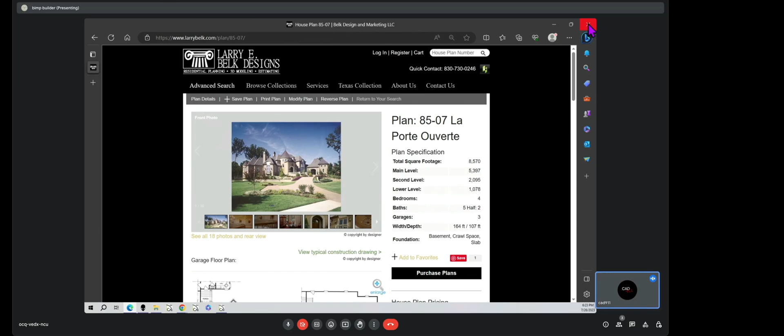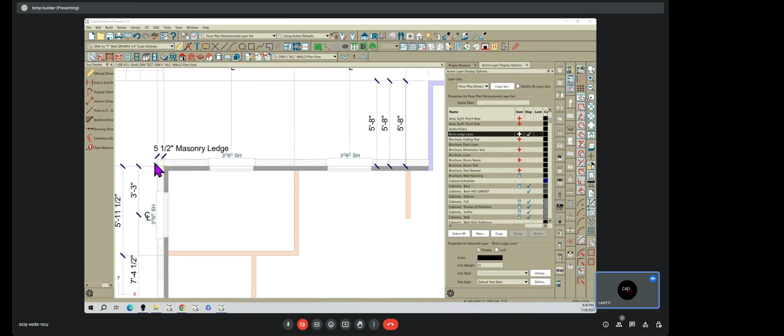And then I like to have a dimension over the brick, because if you have brick, most of my builders use a 5.5-inch brick ledge. They just take a 2x6 and turn it flatways on their forms, and that recesses it down.

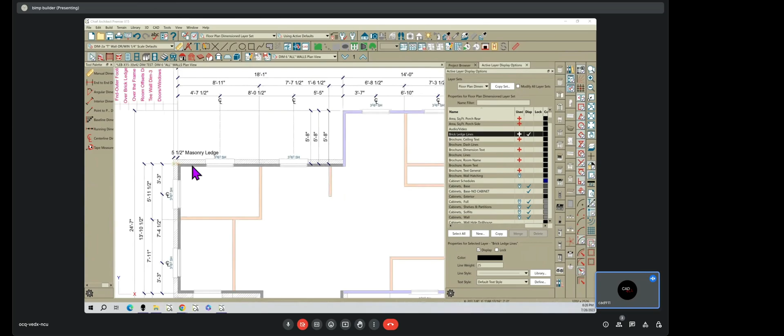And the problem sometimes with Chief, and I noticed it on a video that Mike just recently sent me, is if you click on a wall and go into your wall definition, and this is a brick wall, and you start looking down here at the wall properties, I have 5.5-inch depth. Well, it's 5.5-inch in width, like up here. The extension is 5.5 in width, but it's only 1.5 inches in depth. So a 2x6 turned flat is 1.5 inches.

So I think Chief really needs to have one more dialog box right here, where the depth is one thing and the width of the brick ledge is another dimension, because it's not 5.5 inches here and 5.5 inches up there. So, you want to chime in, Mike?

Yeah, so like in Tennessee, where they put the brick down below grade, I could see that would be an awesome thing to have, but they hardly use slabs. They use CMU on footings. But same thing though. You could go down so many inches vertically and then still go in. And I think they did 5 inches in Tennessee, I can't remember. But I know their airspace.

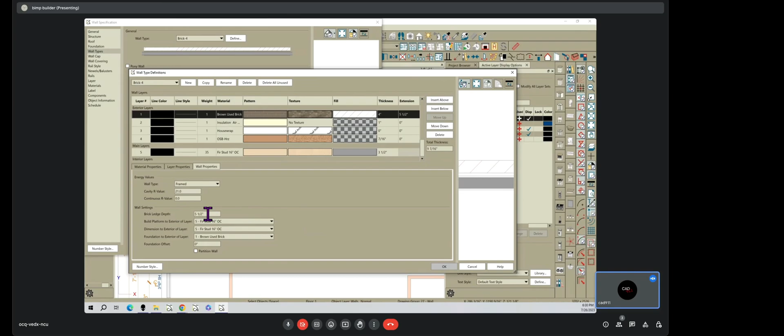And the same way if you're using thin set stone. Yeah, cultured stone. Usually, if you go by the manufacturer's recommendation, that winds up being 3.5 inches out. So you have a 3.5-inch masonry ledge if you're using that, because otherwise that stone is hanging off of the slab, and you just don't want that. It looks awkward. Yeah, it looks unnatural.

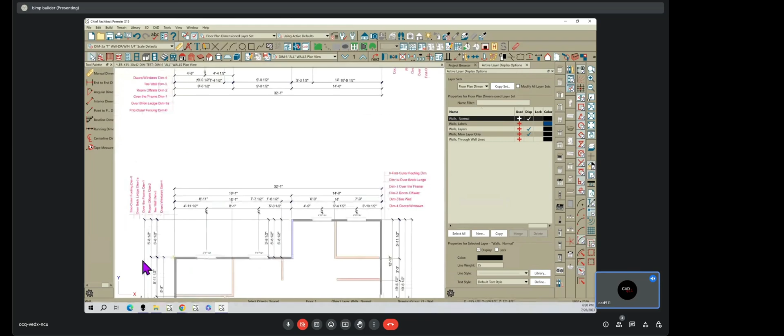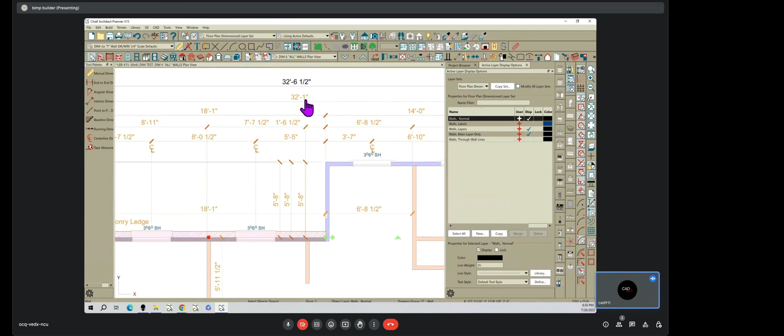I'll show you over here. Let me find it. Well, it's not turned on. Anyway, on these other plans I had a 3.5-inch ledge and a 1.5-inch ledge. But you can see on this plan, if you look at the dimension 32.1, that's over frame to over frame, and you've got the 5.5 inches here, and over on this side the 1.5 inches, and it should be 7 inches.

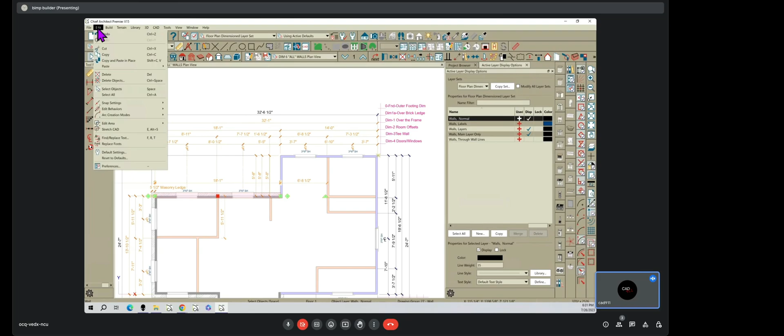The people that are watching right now see the finished product. Can you walk us through how you've set up the automatic dimensioning to do this? Yeah, let me just kill all of these dimensions, okay? We'll go down to automatic dimension and kill those. So this dimension here, it did not kill because that's a manual dimension. I had to put that dimension in manually.

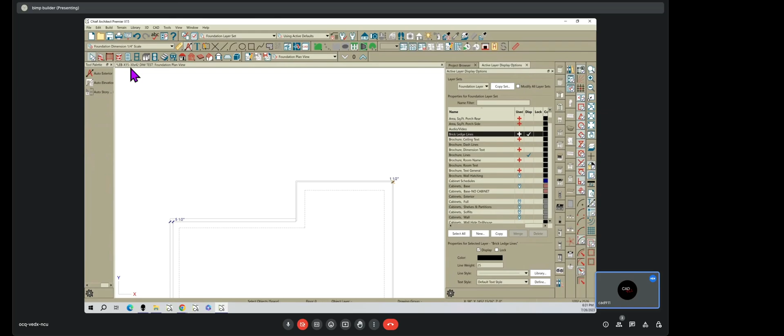While you're at that, let me ask you: if you were on the foundation level, then that dimension would be automatic because it would read to the outside of concrete, right? But if you're on the main floor or above the foundation, it doesn't read to the outside of concrete? Okay, there's the foundation. So if I hit automatic, there's the correct dimension. See, 32.8, 5.5 inches here, and 1.5 inches here.

So it's going over the brick and over the stucco ledge. Which is what you want as a foundation guy. You want those dimensions. I didn't hear you, what'd you say? Yeah, if you're the foundation guy, you need those dimensions to know what your maximum concrete span is.

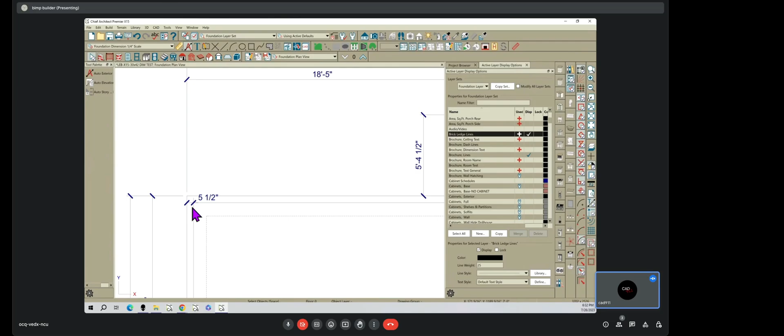Yeah, and the other thing, you need this dimension because if the concrete man doesn't have a dimension telling how wide the brick ledge is, he's got to go hunt for it somewhere on the plans. And if you go to the floor plan, it's not showing up in Chief because they really don't have that. On my plan, I had to go in and create that.

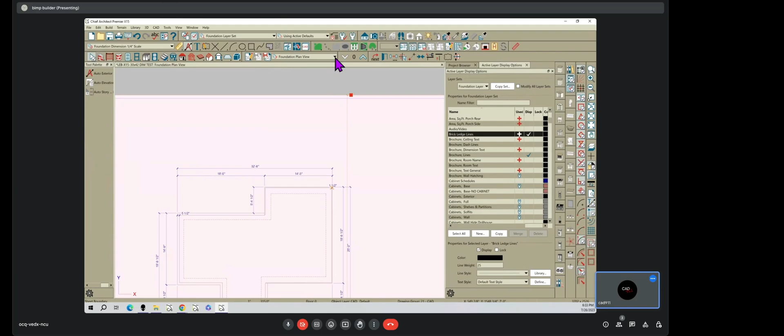So that's one of the problems I see with this, okay? Because if you go, let me go to my working, see this brick ledge right here on my floor plan, I had to create that, okay? Because it's not showing up on the working plan view. Brick ledge shows up on the foundation, but it does not show up on the working. At least I haven't been able to get it to show up.

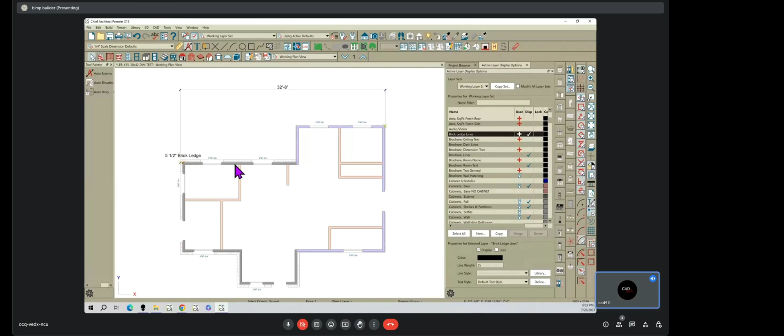Now, guys, like I said, I'm still new to Chief. So some of you pros out there, maybe y'all know how to do that. I just haven't been able to figure it out. The wall type is brick, and you didn't draw that hatched brick line. Yeah, you double clicked on it, and you see it is a brick wall. So Chief's drawing it. You're just not able to auto dimension to it. No. Does it dimension? I want to be able to do that.

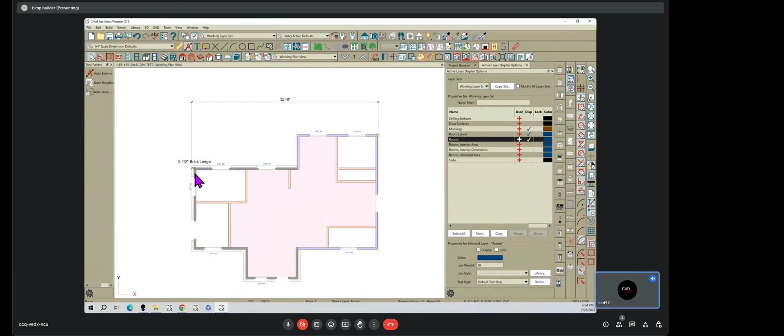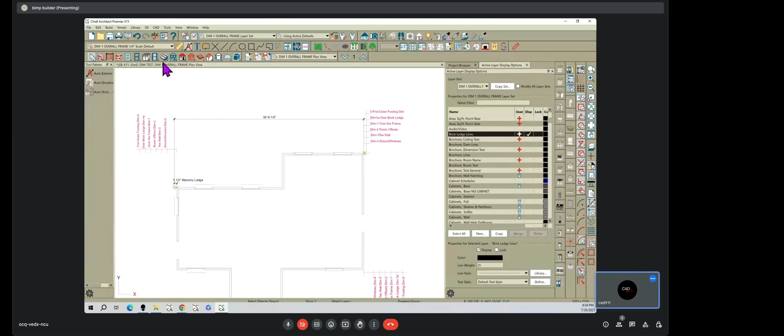Yeah. So anyway, what I'm trying to do is to go in here, and I have a dim one dimension, and I like all my dimensions to be on a layer to themselves, just like I've got right here. So I go with dim one, and I hit auto, and it's going to put that overall dimension, and it puts it over the frame right there. That's what it's doing all the way around the plan.

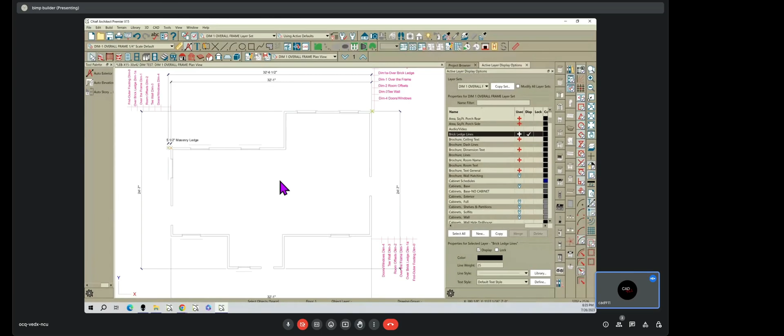And so that's the first thing that I want to know is the overall of my footprint that I've created, because that way I know it's in the building lines, depending on your site. What your maximum footprint can be, and setbacks. Then I just move down to the next one, and that's my offsets. And I have it turning the previous layers off automatically. I like to concentrate on one thing at a time when I'm dimensioning. So I click auto, and it puts that string right there on room offsets all the way around. So that's the next thing that I do.

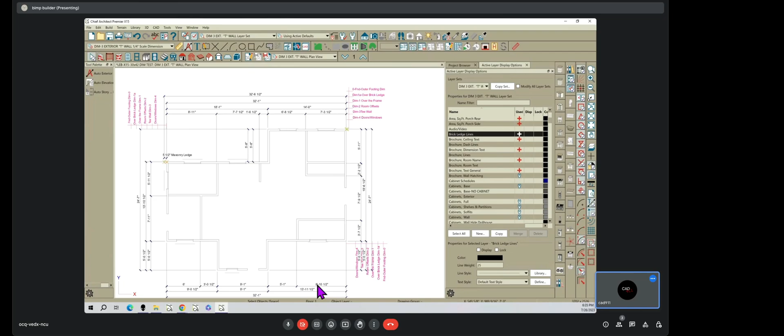And then I go down and I click on my T-walls, and I hit auto, and it puts the dimensions of my T-walls all the way around the plan. Now, there is a workaround you have to do when you go to put your windows and doors in. So I've turned everything off. The way Chief has it set up in their dialog box, you have an inner and outer dimension. Can you show that? Let me go here and show you. You see these two lines? When you go to auto to do your setup, I have it clicked, inner and outer dimension, and when you hover over that, it's highlighting that over here. So that's your two dimensions. Oh, it makes it go red. Okay, I see that.

So automatically, if you just hit the auto button and don't change what I've done, Chief is going to put those three lines all the way around your plan. And the problem with that is when you get down to your windows and your T-walls, it starts putting like 3 feet here, 2 feet here and another 4 feet or whatever. It's all mixed up between windows and T-walls. And that causes the framer to have to add some of these dimensions up in his head because it's not an easy dimension string. Yep. And so I've had to go in and change that.

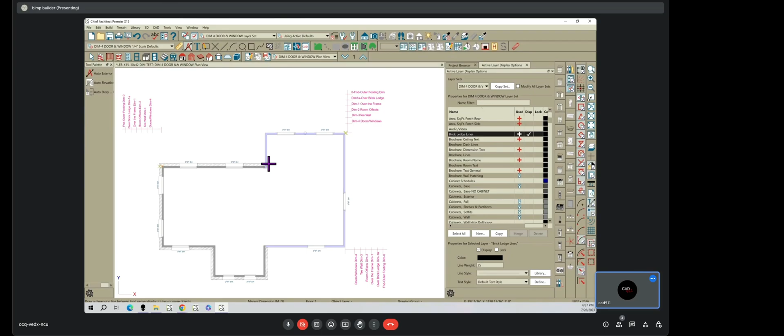So what happens when I pick my windows and doors and then hit auto, it's going to put the windows and the T-walls at the same time. It's going to put those last two dimension lines. You see how the window here, you've got your windows, you've got your offset. But this dimension here is on windows and doors, just like this dimension is, and I don't want that dimension on that. So I basically have to go in here and click on that dimension all the way around, the 4 clicks around the plan, and I delete it, okay?

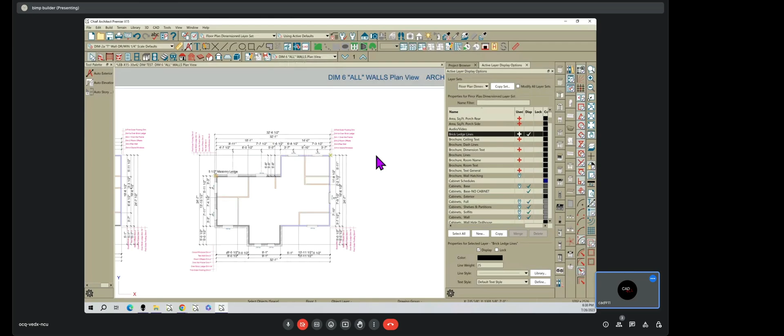Because I do not want that dimension, because I already have the T-walls on their own layer in the plan, on a layer to themselves. Yep. And so all I do is hit this one where it's all on, and there are all of my dimensions. And you'll notice that that one is on windows, that one is on T-walls, that one is on offsets, that one is your overall frame.

So that makes it real easy to string those dimensions. It's going from window to wall, to center line of window, to center line of window here. And your T-walls are all on this line. So it's easy for the framer to pull his tape. Yep. And Mike, you can chime in there.

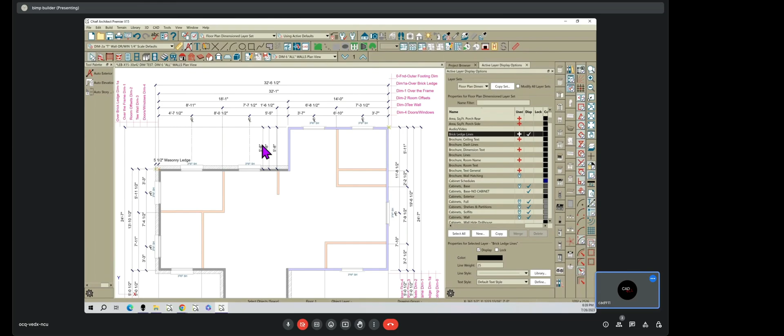You're framed. Well, yeah, and I'm just looking at it as you've got everything you need, and now it's just a matter of doing a little bit of cleanup. You know, like you've got 3 5'8" offsets there, so you can dump 2 of those. Yeah. You've got to erase these because Chief is going to just keep putting the same dimension on there. Yep. But it's easier just to click erase than it is to click that little handle there and drag dimensions off, you know, like you have to do cleanup. I don't like the cleanup. I want things automatic and set in their place.

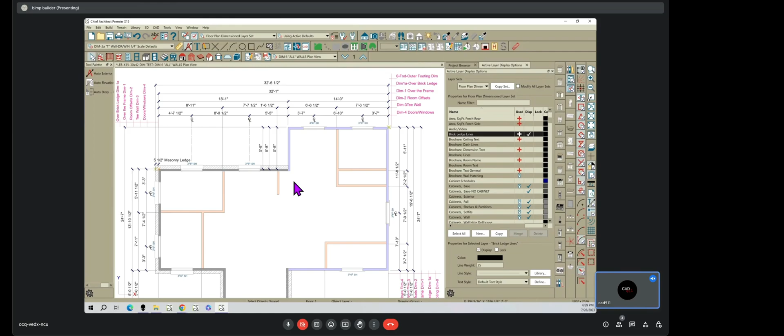Okay. Yep. So that's what I was trying to explain on the previous video, but I just didn't have it all working properly on that. And I apologize for that, because I thought I had it working and then all of a sudden it wasn't working because I kept messing around with it. And so I've got this one working and this is the way it stayed. Okay. That's awesome. Until we can get Chief to come in and, what we really need is here, we need to have the ability to have more lines, more dimension lines, more control.

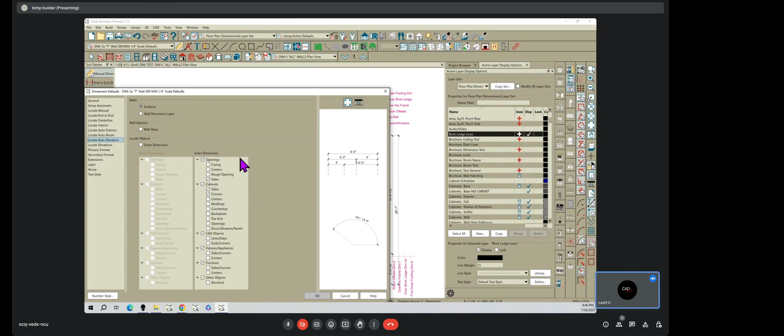And if you notice, if you go to the auto elevation, let's see, which one is it, Mike? Yeah, do you remember? It's auto elevation. It's that one. That one right here? No, maybe it's locate. I think it's locate elevations. Yeah, there we go. It's locate elevations. If you notice, they have a vertical string of dimensions, and you can have it pick any kind of point that you have in this box right here. Okay. You can drag any of these over here. You can drag them off. So you can customize this story pole any way you want to.

And Chief, if you're listening, this is what we need on the floor plan dimension dialog box. We need something similar to this that we can put as many dimension lines, references that we want, and the user has control of it just like the user has control of this. And the points are there, just like these points are in the database. Those points on the floor plan and foundation plan are in the database.

Yep. You know, we would love to have dimensions on the foundation plan that locate all the plumbing fixtures, but the plumbing fixtures need to be on a layer to themselves, not on a fixture layer. Yep. Because you need to have a ghost plan of the floor plan showing up on the foundation plan. And again, that's something else we need to turn a layer on to have. But then you can dimension from the outside of slab to the primary wall that the plumbing fixture is butting, to make sure you get all your vent pipes in the walls and all of the fixtures are located. That means lavs, sinks, any plumbing fixture or water line needs to be located on the foundation plan.

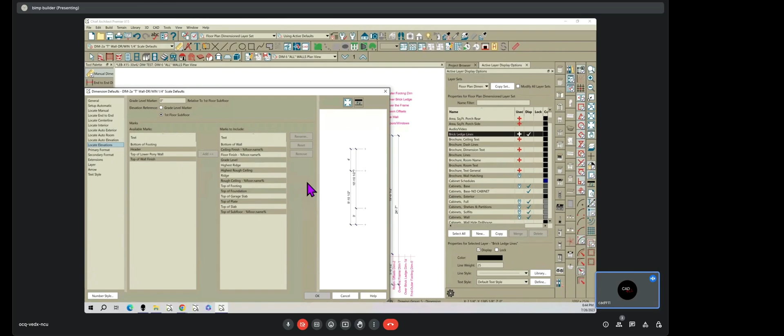That's awesome. Anyway, so that's kind of my little spiel. I think you nailed it, because normally you and I get talking and it could be an hour. So this is actually really good. I know, I'm trying to cut it short.

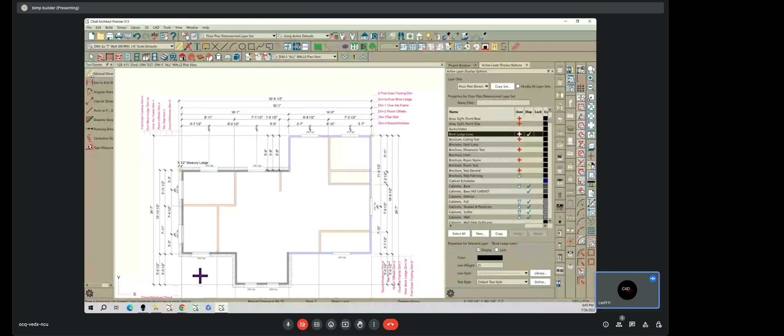Okay, so guys, this is very informal, we want your feedback on this. Like I told Mike earlier, you can ask 50 different designers what their workflow is, how they do their designs, and you're going to have 50 different ways to do it. I'm just showing you my way, and I've been doing this for right at 50 years, using dimensions like this. I was in AutoCAD, and there I could put all those dimensions on a layer. Same way in SketchUp, you can have it on a layer, have your plumbing fixtures on a layer, give center lines. So I just think it would make Chief that much better if we could have more control over the dimensions and more control over the plumbing, having a layer to itself.

Mike and I are trying to work with Chief on the roof problem we pointed out in an earlier video, and hopefully they're going to get that corrected too. So I want everybody to know that. That's all I got to say, Mike, you can take over.

I like Chief, I find it amazing on some of the things it can do, and all I want is extreme accuracy. So when we saw that the roof wasn't quite being done correctly, we reached out to Nigel, and he's working that angle, because I love how I can get a plan to permit really quick. That's to me how I make my money. I don't do 3D renderings, I don't do marketing pictures and stuff. Usually builders have already got a client and they just need the plans for permit.

But I think this is an awesome idea here, and the reasoning why you do it, because I look at the dimensions right there, and if I had to pop out a slab, those are the numbers I need. I hate having to come to a certain spot, hold my tape there, and go to the next spot. I like to just pull the full length.